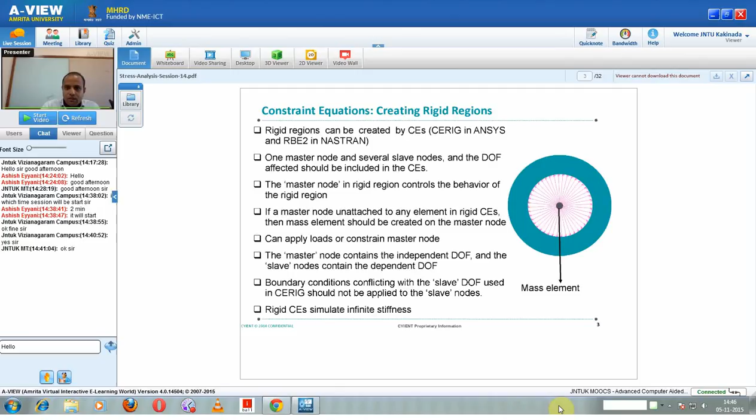So basically the function of the master is the average of the slaves.

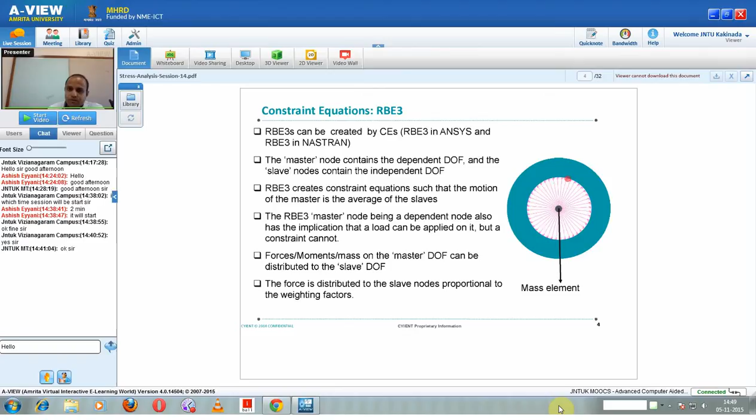Let us look at one example. So here we have taken a case, a theoretical case. These are the geometry type of the case.

This is the length of the case, and the diameter of the case is so, this case is, so we want to analyze this case.

So one is modeling strategy, we will use 3D models or shell models. Second thing is the goals. So these are the 4 things we need to use.

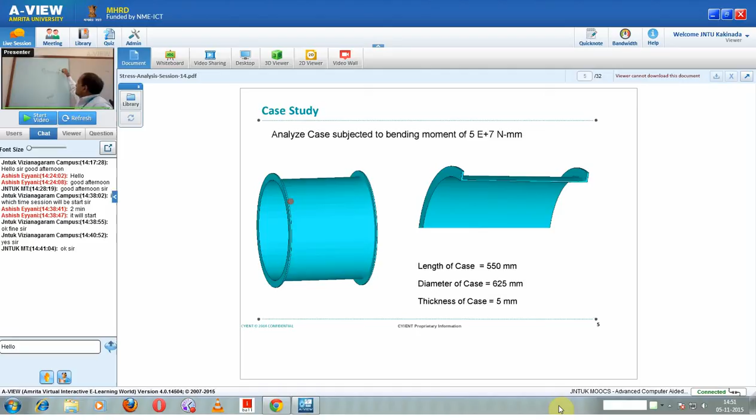If you take any 3D three-dimensional problem, we can make it a two-dimensional problem if we can make a very good assumption in the third dimension.

For example, in this case, if you take this cross section, along the third direction, if you make a suitable assumption, then you can take it as a 2D problem.

Similarly, we have plane stress and plane strain problems. With suitable assumptions we can take it as a 2D dimension problem. 2D models such as plane strain and plane stress.

So in our model, the current model is an axisymmetric problem. Geometry is axisymmetric, then we consider it as axisymmetric.

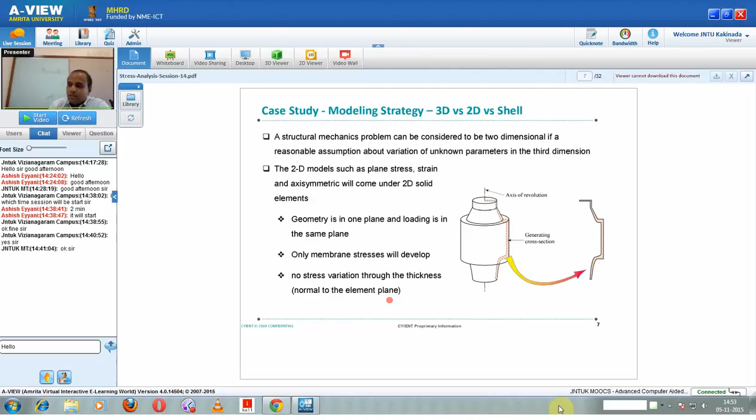So when you try to assess the thickness ratio, here in our condition,

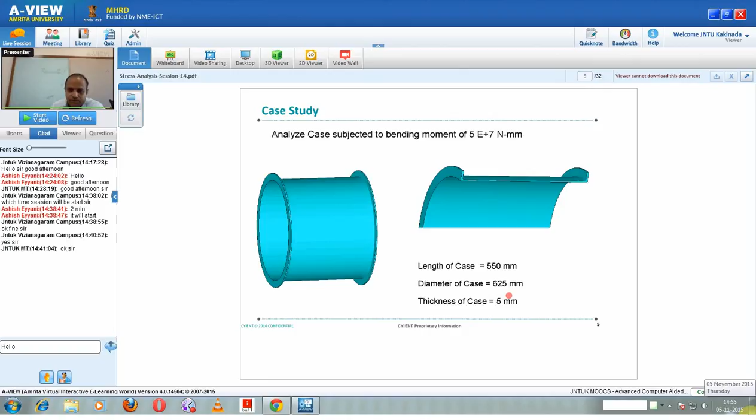diameter is 625 mm and thickness is 5. So if you calculate the thickness ratio, it will come almost like 50, more than 50 or 60. So we can use our ratio.

So generally in shell model what we need to do is we need to take 3D geometry and extract the surface, and we need to attach thickness to the surface, which represents the actual thickness of the geometry. The condition is the radius to thickness ratio should be more than 5. So this can be modeled using shell, and using 3D we can do the analysis.

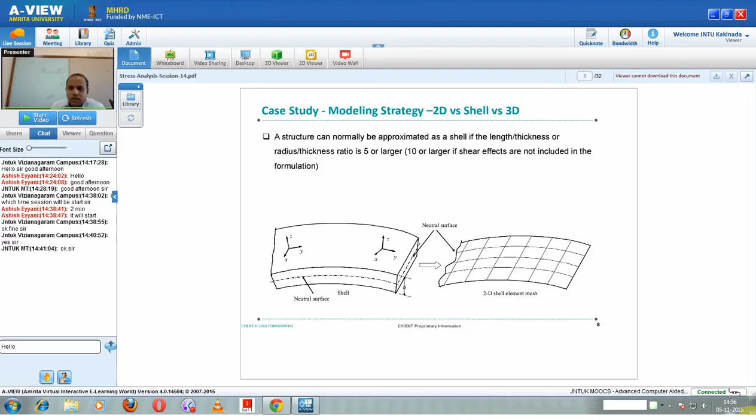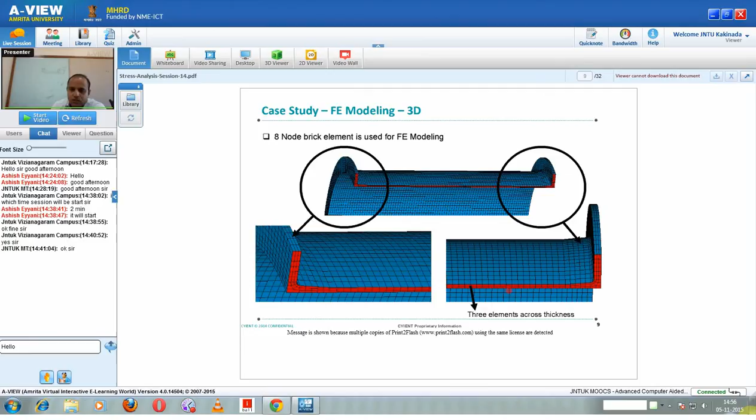I have taken a snapshot of this model, I modeled 360 degrees to show the elements across thickness, and selected the sector model represented here. We have taken 360 degrees and put nice thickness here, and we have put 3 elements across. It is always advisable to have 3 elements across thickness so that the bending will be captured properly.

Now some other things related to boundary conditions. In this case, the surface is constrained in the axial direction. Axial direction, meaning along this direction, we are constrained within that plane, and we need to go more in the circumferential direction. Circumferential means what we need to do is rotate this node in cylindrical coordinates.

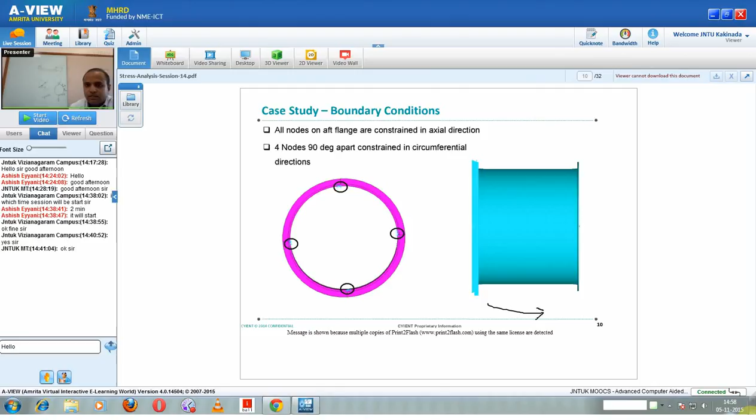So for applying load, we need to, as we discussed, use RBE3. So here we have created an RBE3, and we have put a constraint here and we need to apply a moment here. So at this point, we have created a mass element at the center.

At the center of the cylinder, at the forward plane, we have created a mass element, and it is connected to all the forward faces using the RBE3 element function. The mass element is assigned with negligible mass and inertia.

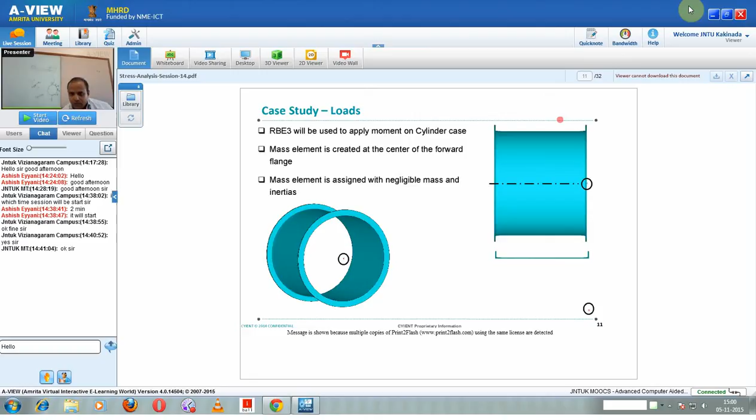If you take a cross section of this one, so this is the cross section and this is the mass element. So this is how it looks. So here the mass element is the master node and all nodes on the forward plane are connected to it.

If I take a cross section, so all nodes on this plane are connected, and connected to the master node. So this is the master, and this is how we connected here.

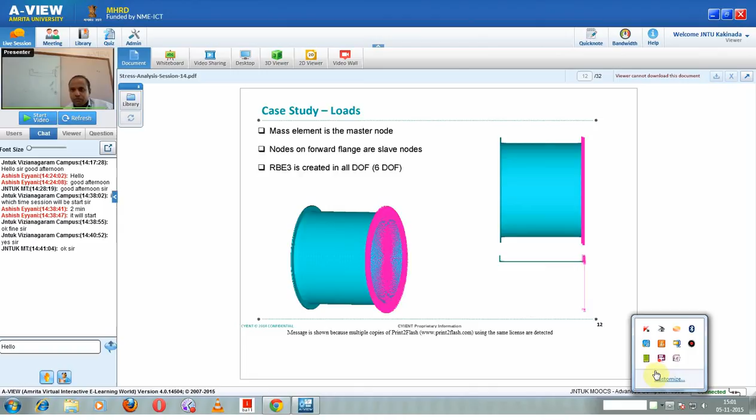So when I try to apply a moment, we applied the moment along the x direction. Along x direction meaning it pushes this way, this way. So this is our understanding, and when we try to see the result, it is giving that same fashion. Suppose if it is not giving a similar fashion, then we need to understand whether our simulation is appropriate or not, and what is the issue.

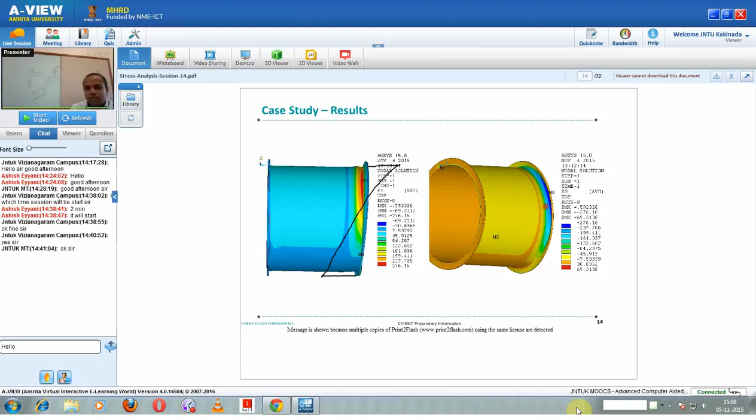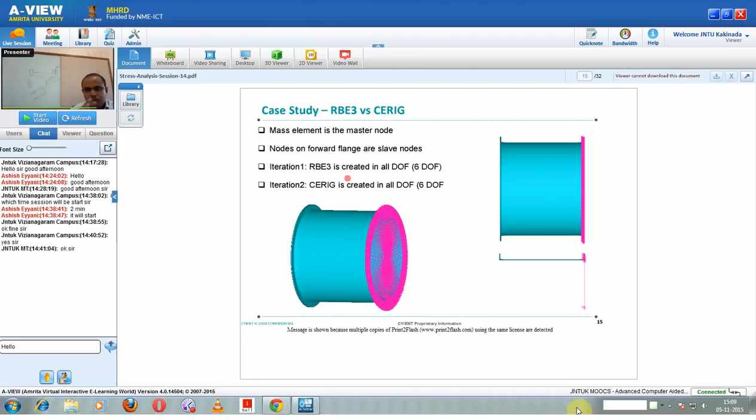Now let us look closely at the difference between CERIG and RBE3 for this particular problem. Similar to RBE3, here also we need to create a master node, and nodes on the forward plane will be connected to it. We carried out two iterations. One iteration we already discussed about RBE3. The second iteration we have created CERIG, and we want to see the difference between RBE3 and CERIG boundary conditions.

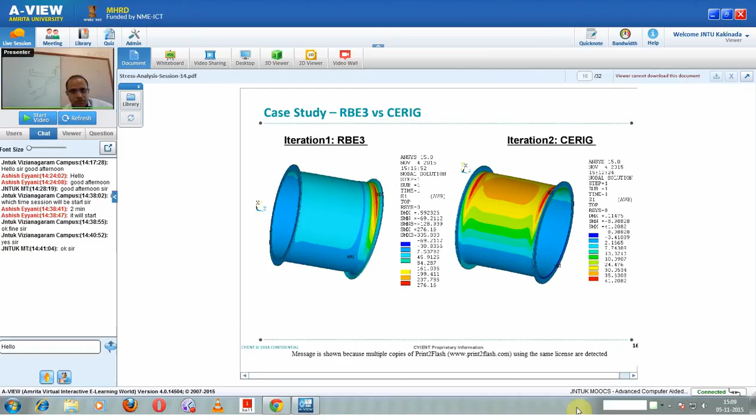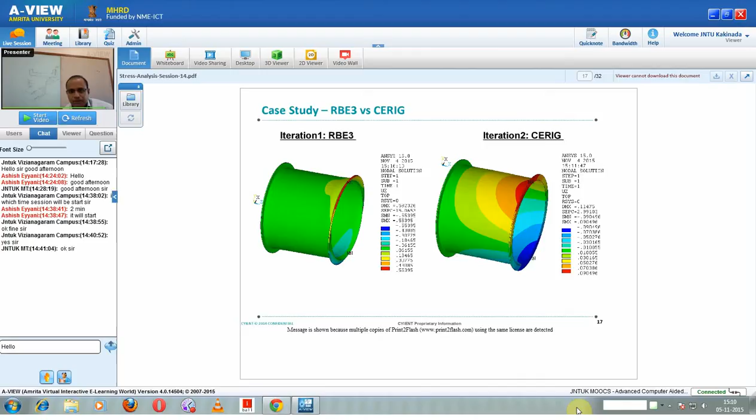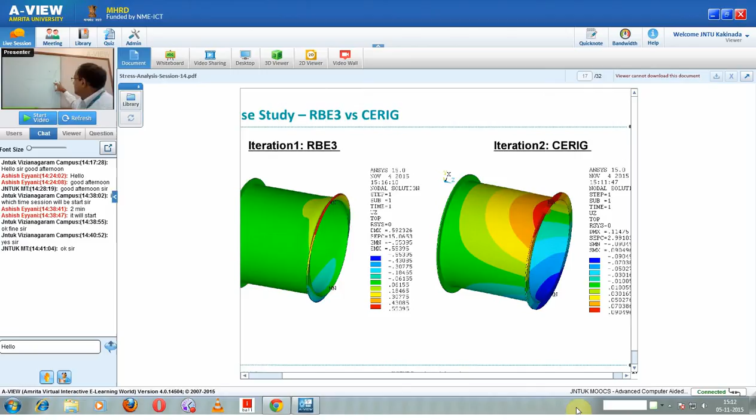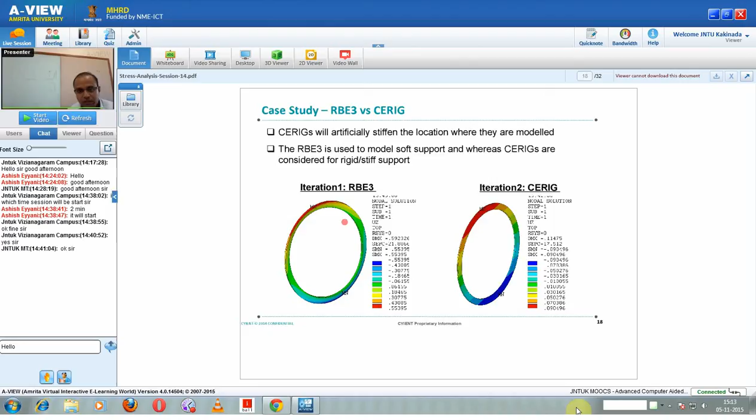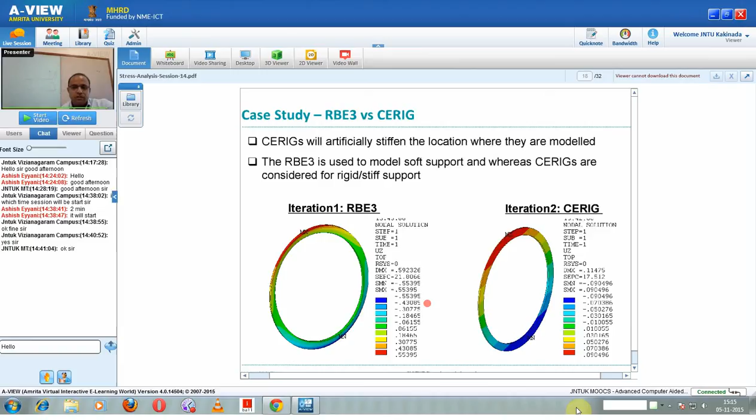Coming to same model, we discussed the model can be modeled either shell model or 3D model. This model will also qualify for shell model because the radius to thickness ratio is more than 5. Here the ratio is almost 50 to 60. So definitely this model qualifies for the shell model.

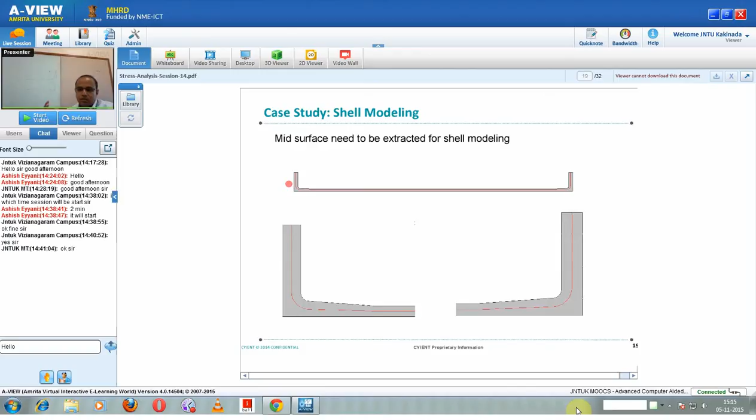So here I will be explaining how to do shell model. Typically what we do is take a 3D model, and if you want to do shell model, we do a couple of things. If the model is complicated, we need to take CAD support like IronCAD or similar tools to extract these structures. If our geometry is as simple as this, we can take it and model the structure of the geometry directly.

So here what we have done is we have taken the cross section of the geometry, right? We extracted the surface, the outline to the surface. Basically we have used some bounding techniques in ANSYS to extract the surface. So we extracted this surface here. One of the important items is we have followed fillet here on the sharp corner, and then we have extracted the surface - on both sides we have followed fillet.

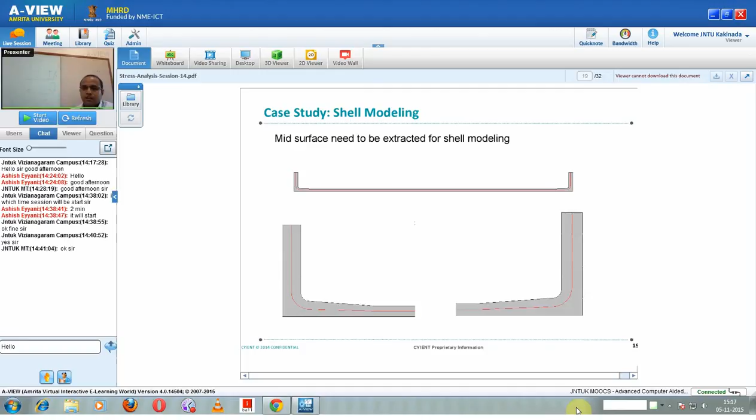Let us look at the cross section. So this is the cross section, and this is the shell model, shell element. So you see here, once we have done the shell model, one of the important things is assigning real constant or thickness.

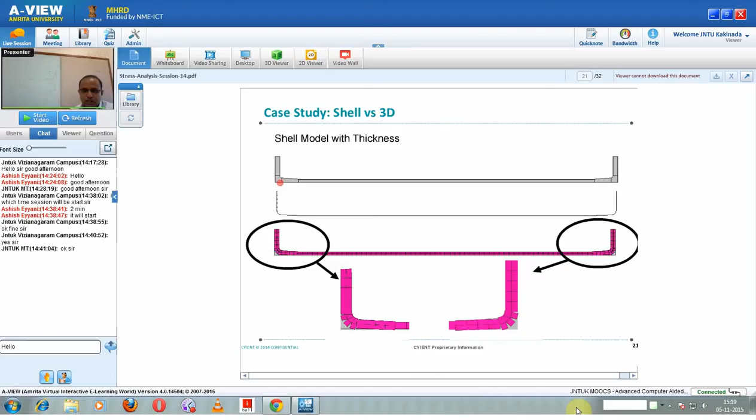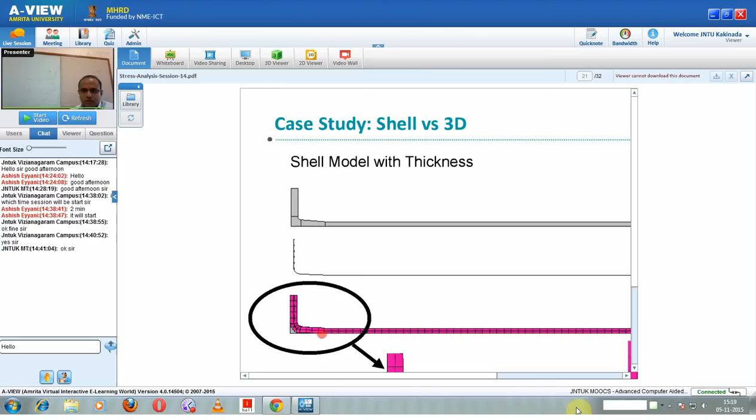The reason is, for this type of analysis, the stiffness of this bend will play a major role. We are not able to capture this. That is the reason we may have issues with the analysis, because overall we may lose some stiffness of this geometry. So I did not perform any analysis on this, just to give an understanding of how to do a shell model.

So this is what we need to approximate. And this also is getting approximated, not so accurately, for this type of problem.

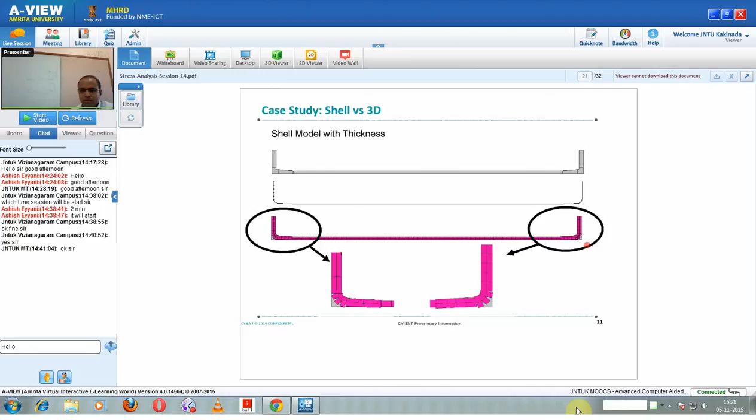So coming to singularities, I think we discussed about singularities in the last session. Just want to touch base on singularities.

So, as we discussed earlier, these are related to the artificial stresses caused on a geometry because of loads and applications, like application of loads and resolution. So if our mathematical problem, loads and boundary conditions, does not reflect the physics of the problem, generally we get artificial stresses. These artificial stresses mainly occur whenever you apply a point load or point constraints at one or two locations.

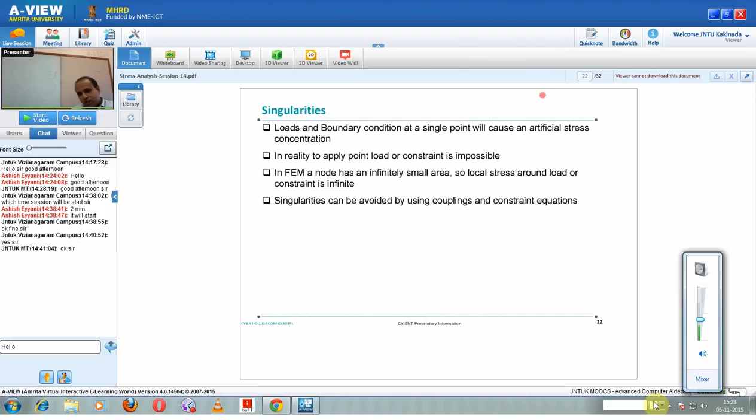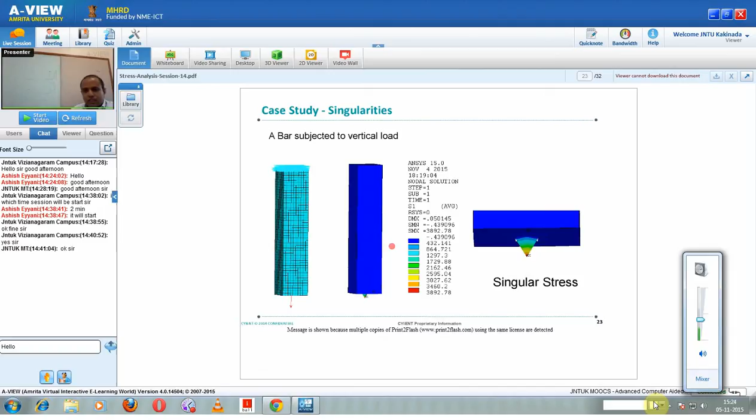Let us take a simple example: a vertical bar subjected to a point load. Here we have applied a point load, and if you see, we get a very high singular stress with that load application. So definitely it needs to be resolved, because this is not correct, or this type of behavior will not happen in any of the actual mechanical model problems.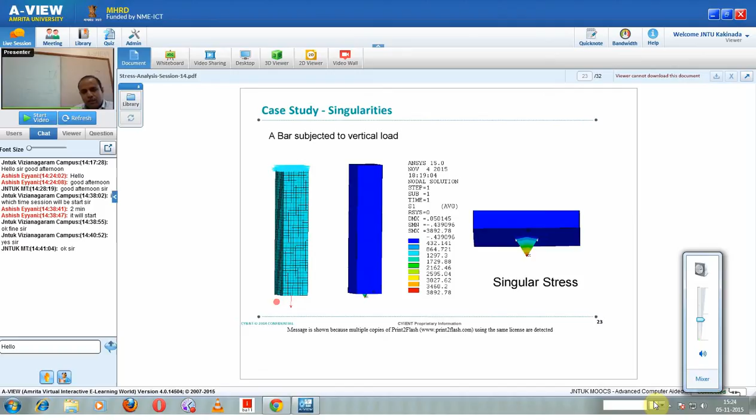So it has to be avoided. One simple way of doing this model is to apply a uniform pressure on this face. That is one way. Second, we have RBE3 and RBE2 concepts you can use for connections. Here what we have done is created a mass element at the center of this face, and connected all the slave nodes to that mass element - in one iteration using RBE3, and in another iteration using RBE2.

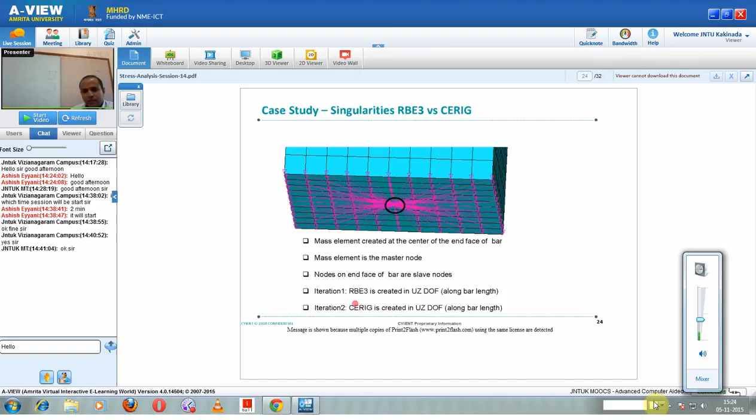So when I try to apply RBE2 and RBE3, if you see the deformation plots, RBE2 seems to be having issues. The reason is RBE2 will try to make the complete location rigid and pull together, whereas RBE3 will be more flexible - it will try to pull based on the directions from the surrounding mass. So this behavior with RBE3 seems more reasonable compared to RBE2.

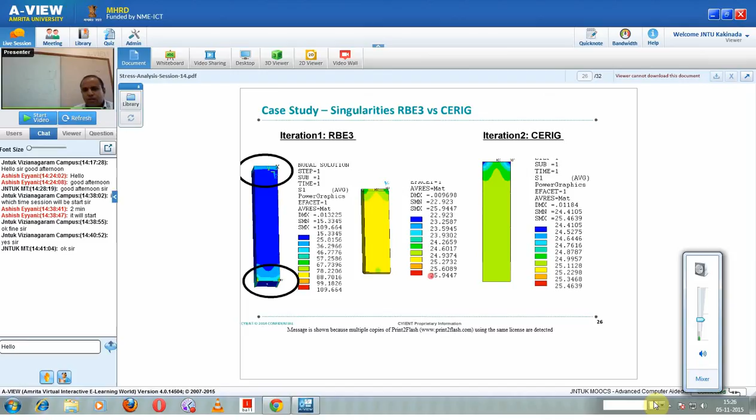And when you check the stresses here, again we are getting very high stress at these locations in the RBE3 connections. So when you try to unselect these locations, we are getting 25 KSI - that is the actual calculated value, load by area. Whereas with RBE2 we got some very high stress here, but after unselecting at the constraint location, most of the locations show 25 KSI, and the complete contour is varying close to 25.

So this shows that RBE3 is having the correct deformation, the correct behavior when you try to pull the complete geometry together. So when you want to apply a uniform load on a face, this RBE3 approach can be used. I don't know whether it is clear or not.

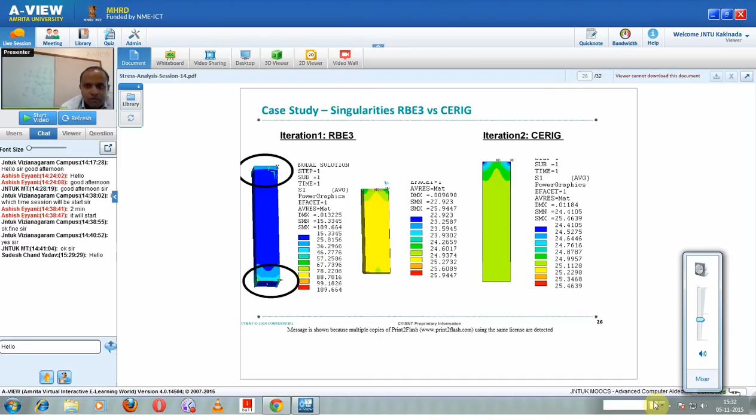So that concludes our discussion on loads and boundary conditions. So far we discussed gravitational loads, that is body loads - both gravitational and omega loads - then point loads, then surface loads, and another important thing is thermal loads. These thermal loads are very important when we try to do analysis on aero engine components and automobile components, because there will be a lot of thermal activity going on in those components. So let us understand the basics of these thermal loads.

So basically, whenever you apply heat or try to cool, there will always be deformation happening in the components - either it may be expanding or contracting. So let us take a component and try to heat it to 1000 degrees, and there are no constraints to this component, so it's free to expand. This expansion doesn't cause any stresses; it is free to expand. Unless you arrest it, there won't be any stresses happening in this component.

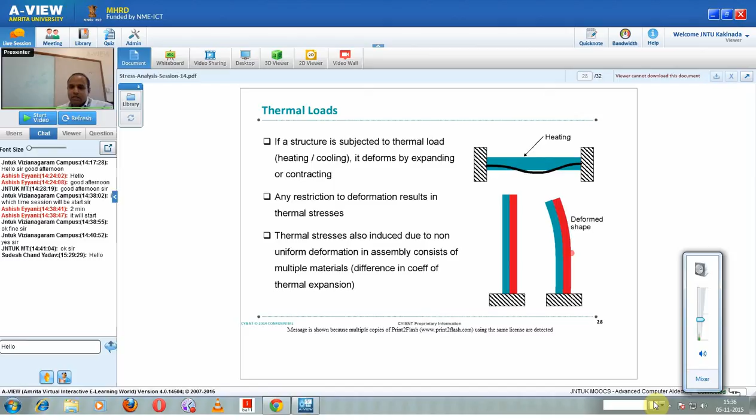So to understand more on this thermal load - generally in the finite element method, stresses produced due to the thermal field are computed for each element, and these are called initial stresses. Generally, whenever, suppose I take a simple cantilever or something, and it is subjected to thermal loads as well as mechanical loads, first it will calculate initial stresses due to thermal load.

It won't calculate stresses due to mechanical loads at first. And because of this, because of temperature, it will calculate initial stresses, and from initial stresses it will calculate nodal loads. So once the calculation is completed, these nodal loads are assembled, and the result is structures whose nodes have no displacement but are loaded by initial stresses.

So basically, in the finite element method calculation, the initial first step is calculating the thermal loads from the applied thermals, and once the thermal loads are applied, those loads will be assembled into a matrix. Then we'll already be having loads, but for each node it will have loads, though those nodes don't have any displacements.

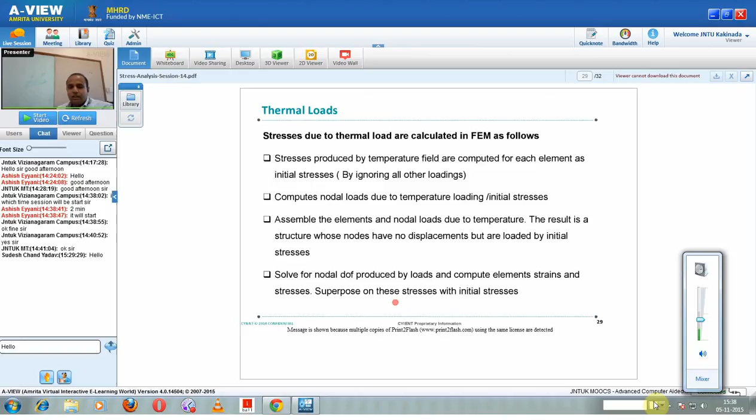Then the matrix will be solved for degrees of freedom for each node. So basically, first it will calculate initial stresses due to temperature, then assemble them into a nodal loads matrix. Then it will calculate the nodal degrees of freedom of the complete global matrix, then compute the element strains and stresses, and then it will superimpose these stresses with the initial stresses.

Let us take a simple example. When a cantilever is subjected to, say, T1 is a reference temperature, and then it is heated to T2, resulting in an elongation.

The thermal strain is alpha, the coefficient of thermal expansion, into delta T. Delta T is T2 minus T1, the difference between the heated temperature and the initial temperature. The initial temperature is also called the reference temperature, and it plays a very important role in calculating the stress.

Then the total strain is given by strain due to mechanical load plus strain due to thermal load. Once we have the total strain equation, combining strain due to mechanical load and strain due to thermal load, we can calculate the stress due to mechanical loads from there.

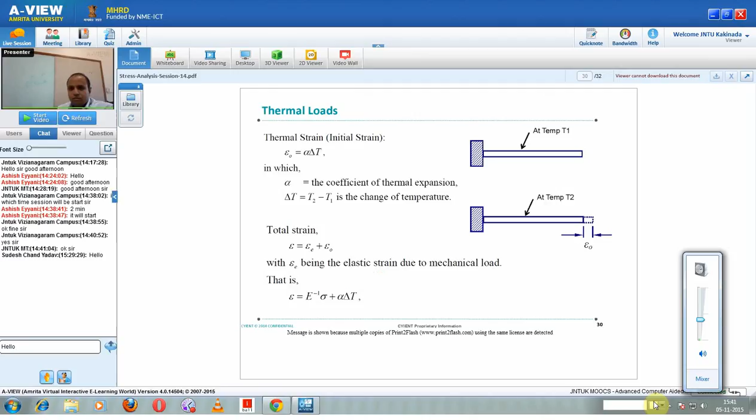Other important things to consider: so far we have analyzed only models subjected to mechanical loads. For mechanical loads we typically give density, modulus, and Poisson's ratio.

When you try to solve a model for thermal loads, we always need to give, in material properties, the important thing: alpha, the coefficient of thermal expansion. This is very much important. So while performing an analysis that contains thermal loads, it is always required to provide the coefficient of thermal expansion in material properties, because the strain is alpha into delta T. This alpha is the thermal expansion coefficient, so it is very much required.

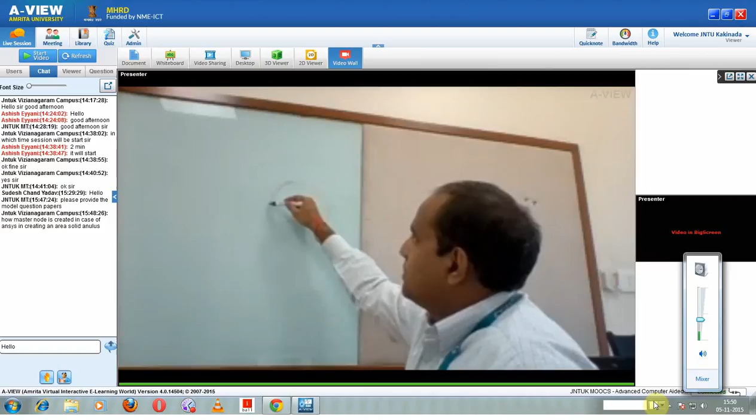Let us take the interface, whatever phase we have used, and we need to create a key point. As I told, another method is usually the ANSYS circle is formed, so you can join these two points, divide it, and you can get a key point here.

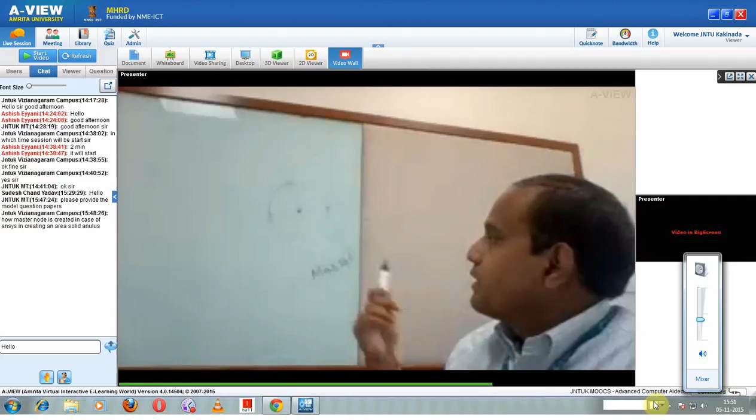This key point you can select mass 21 element and mesh this key point. Generally we can mesh volumes, areas, lines, and key points. Volumes are meshed with volume elements, area is meshed with shell or plane elements, line is meshed with beam elements, and key points are meshed with mass elements. So mass 21 elements will be created on this point.

Then we need to assign real constants. Go to real constants, where it will ask mass in x direction, mass in y direction, mass in z direction, and also inertia in x, y, and z direction. You can say a normal value of 0.001 so that it won't have any impact. This is how we need to create mass elements.

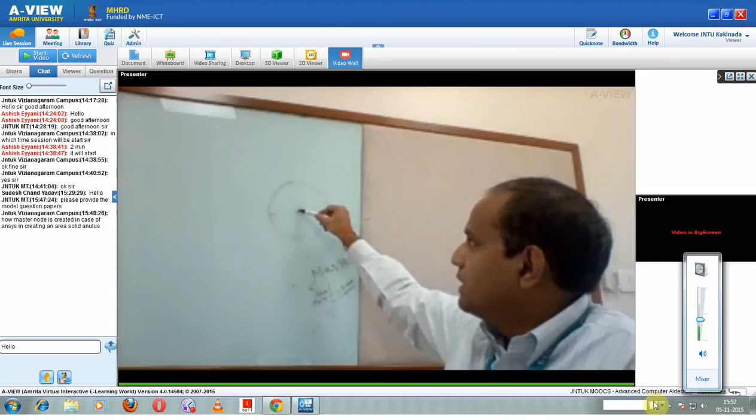So basically, if you are able to create a key point, then we can mesh it, or you can directly create a node. If you find out the location, we can use the create node option, put the location values, and then assign or create an element on node. That option is there in ANSYS. We can use those options.

Hope I cleared your question. If you have any other questions, please wait. JNTU Vizianagaram, is your question clear? Answer is clear here.

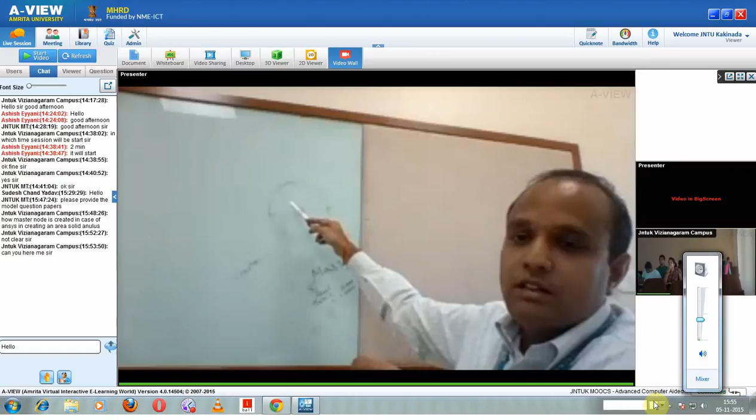What I mean to say is, you can create a key point at the center of the circle. That is very easy. If you draw a circle in ANSYS, it will be formed by four arcs, 90 degrees apart. So you can join the two lines like this, and at the center you can divide that line and get the center. That is one of the easiest ways. Then you can mesh that key point.

Otherwise, if you know the locations, you can create a key point or a node. If you create a key point, you can mesh it by selecting the mass element. Or if you create a node, you can create an element on that node. These are the two options. The ANSYS manual is excellent, so you can refer to it for how to create a mass element or other elements, following the simple steps.

Any other questions? Vizianagaram, your question is clarified. Maybe you can try one example after this class. If you are still facing problems, I'll explain further in the next session. Try one example and let me know in the next class, then I'll try to clarify if you have further questions. Any other questions?